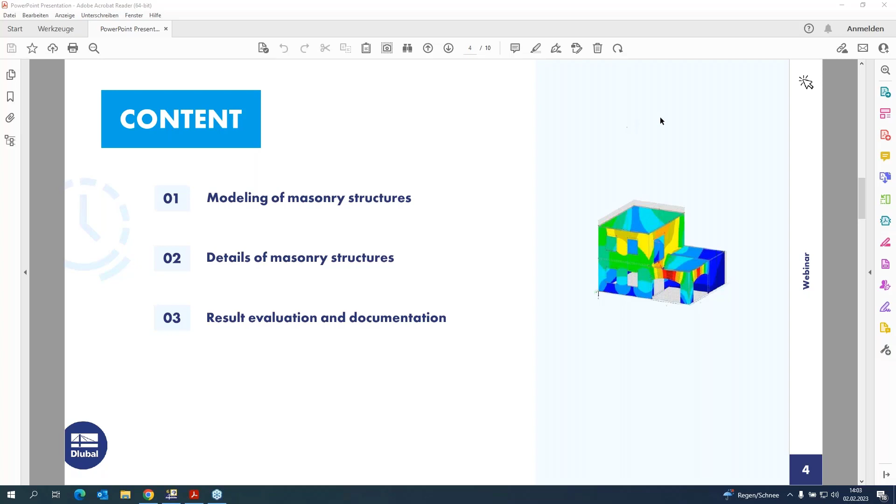So I will start directly with the program. I have prepared a structure with lines and nodes so that it is easier to continue. You can import such a structure also via DXF, or with Revit, if you get this file.

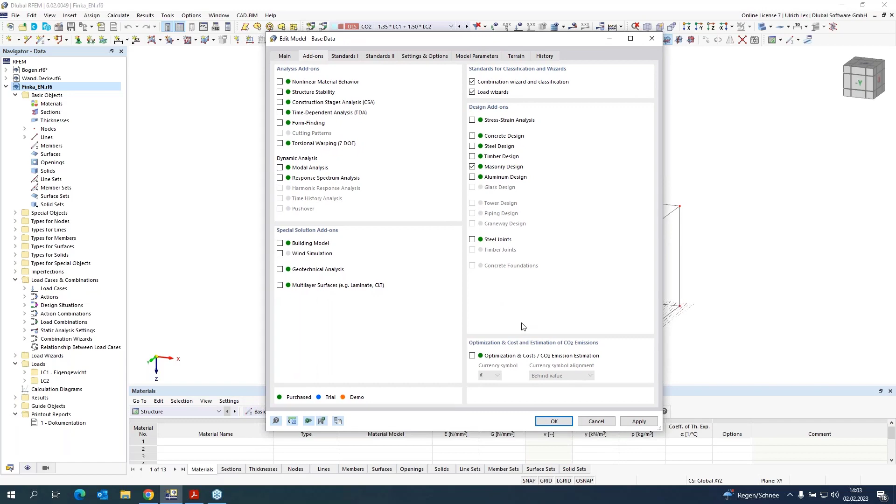So at the beginning, when you work with the masonry add-on, please check in the base data if the module is checked on. This is necessary so that the material model is available in the program. If it is checked on, you can continue with OK.

So for the first step, I want to create some new materials. I can do it here with new material. I can choose one new. At first, I can choose the material type masonry, and here's the material model what I want.

Basically, we have two different material models for masonry. The isotropic one, some of you know it maybe from RFEM 5, and the orthotropic masonry, where you consider the stiffness in both directions and the shear stiffness of masonry exactly. So this orthotropic one is the best one.

Now you can choose a material from the library. I want to create a new material for the outer wall, maybe in orthotropic.

In the database, there are still only products from Austria, but we are continuing to develop or implement new materials as far as we can. So if you read in the materials, you can see in the standard classification the table is filled out. You can also do this with data sheets from a manufacturer. You get all values, I think, from the manufacturer.

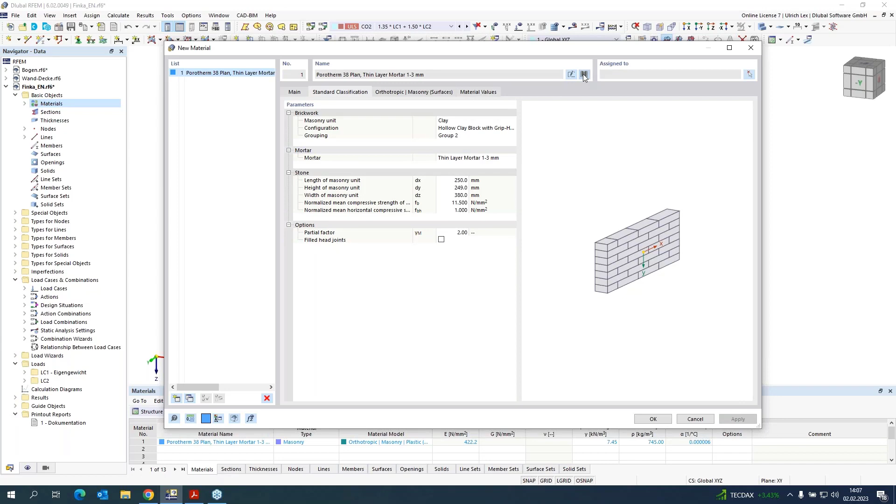Okay, then I will continue and create the next material for the inner wall. It's the same as before. Okay, I have to do it again to create a new one.

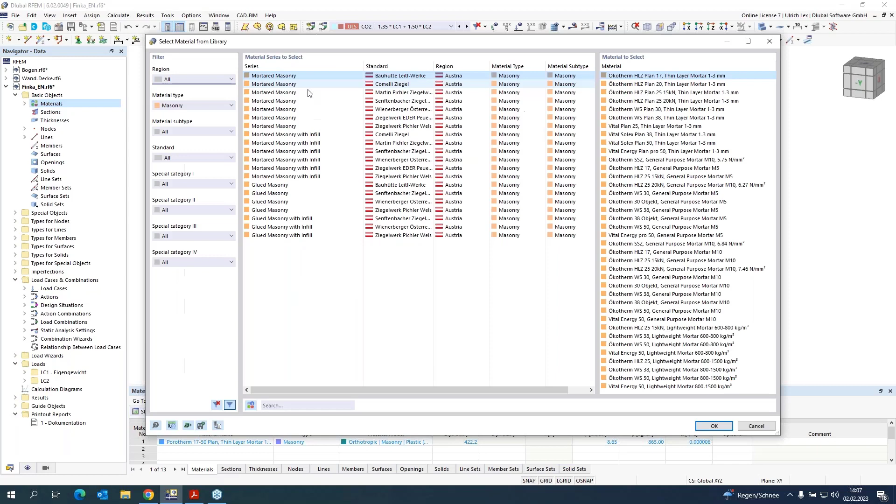And the third one, I want to create a patio and use a full stone maybe. And as the last material, I want to create a concrete for the slabs. So very important, you have to always set the orthotropic material model.

Okay, the next step I want to do is to create the thickness. So the first thickness will be the outer wall with 380 millimeters. The second one with 170 millimeters. The third one 250 millimeters. And as the last, the concrete one with 200 millimeters.

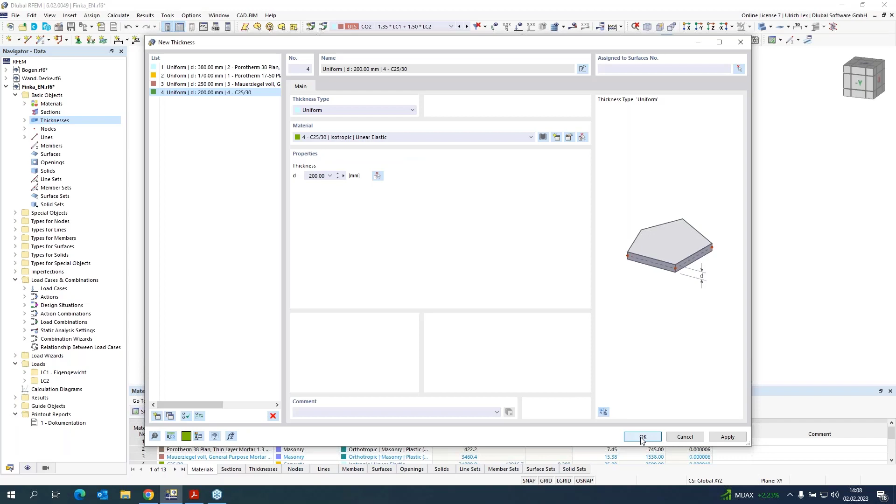So now I have defined the material and its thickness. Then I can start to create the surfaces. As I already have the nodes and lines, I can do it with select boundary. I can choose my thickness for the outer lines, or for the outer wall, and choose my lines to create the wall. I will do it for all walls.

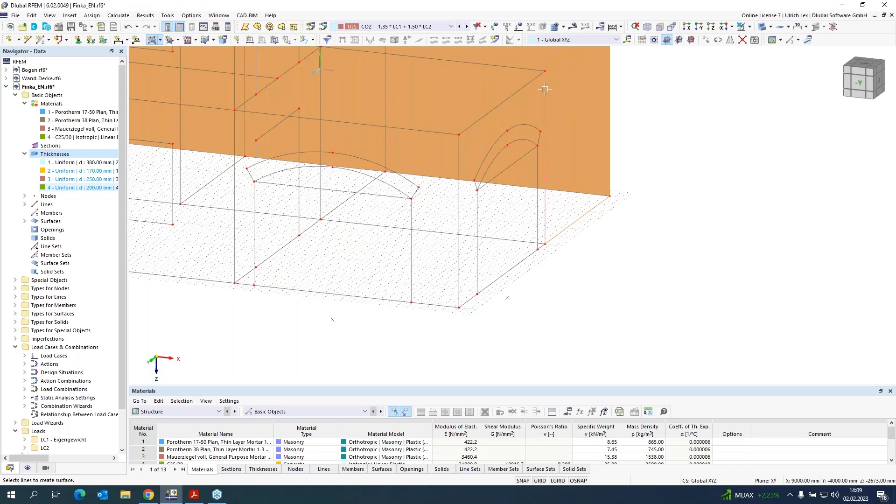This one, and upstairs I have also 4 walls.

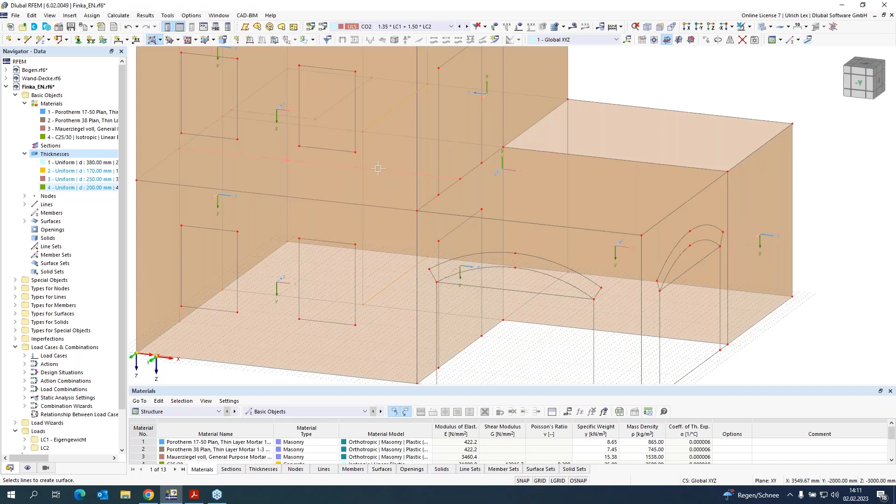And the last one. Okay, as next step, I want to create the inner wall. Choose my thickness - the material is automatically attached to the thickness. I only have one wall inside the building. As the third one, I want to then add... okay, I have here to choose this line.

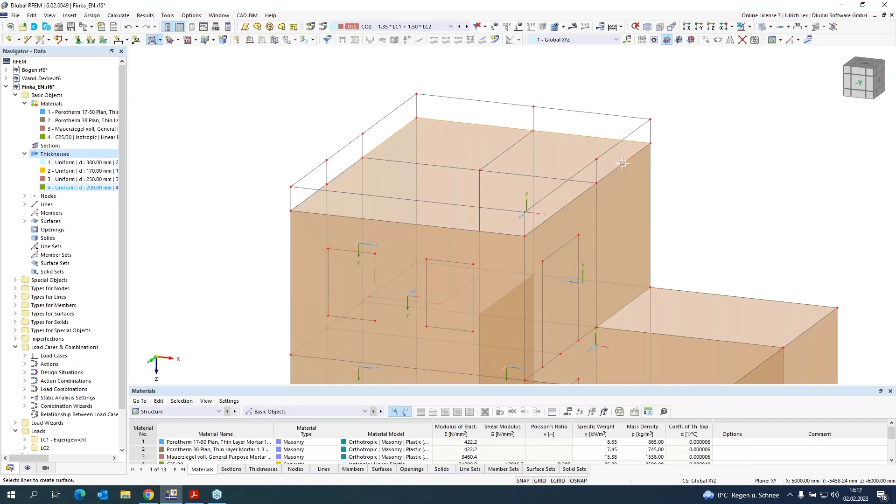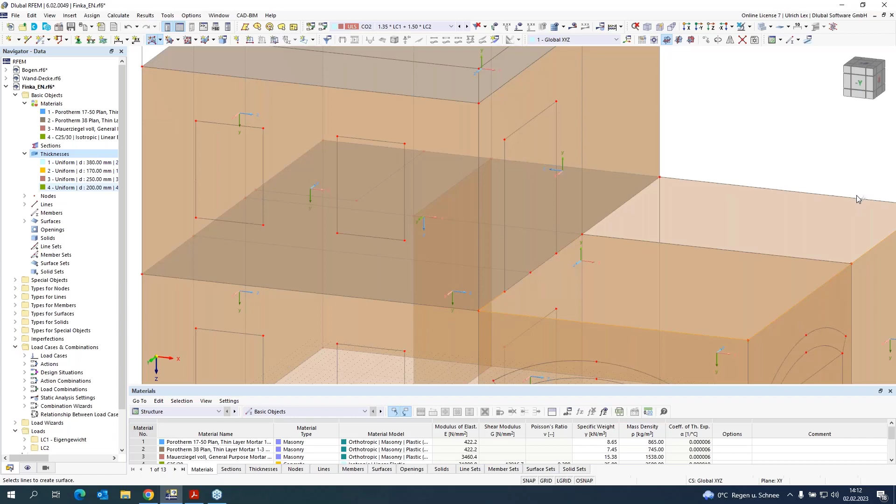And as the last step, I want to create the concrete slabs - one for the roof slab, and the base plate.

So, okay, that was the final thing.

On the roof, or for the roof slab, we have the first thing we have to consider if we work with masonry walls. If you have a masonry wall and a roof slab, then always the slab wants to turn up at the edges. That would cause damage here in the masonry.

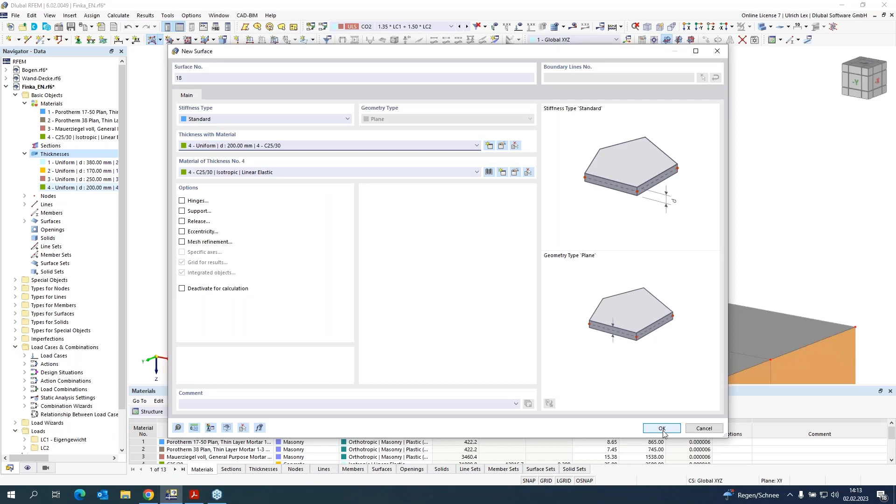That's why we have to create something so that the slab cannot turn up. In this case, I want to create an attica in concrete, so this turn up cannot happen.

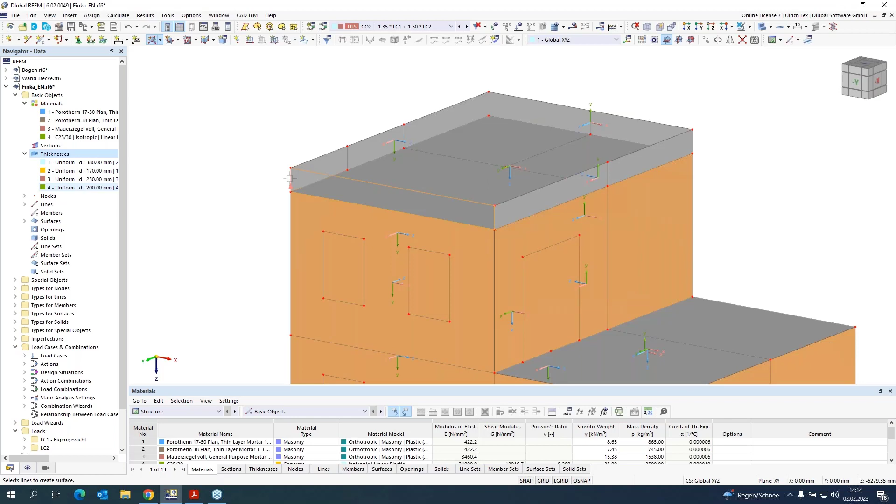That's why I create here some additional surfaces in concrete. That's the attica. Oh, that's the wrong line. Okay.

Here on the patio, we do not want such an attica. That's why we have to think about another possibility to avoid this turn up.

Here I decided to create a new member that connects the slab in the first floor with the base plate, and to, I would say, hold the slab so that it cannot be turned up.

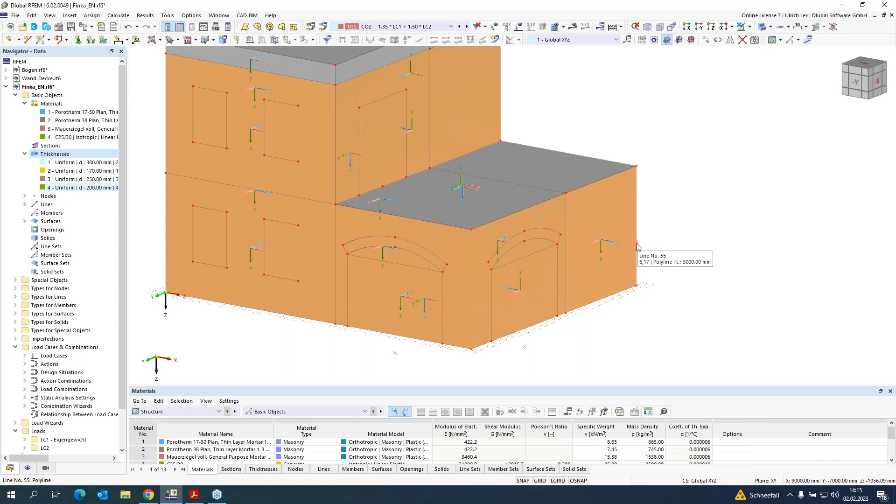So here I can select it and double click and assign a new member, like a member type beam, create a new section, material concrete, dimensions maybe 250 to 250 millimeters. Okay.

Now we have modeled the whole structure of the building. What do we have to think about now?

An important thing is also the local axis of the surfaces. For masonry, masonry does have a different stiffness in Y and X direction. That means the Y direction should always be in the direction where it is loaded, and the X direction is the other direction. The Z direction is important in our program to evaluate the results. And I'm used to orientate the local Z-axis in the same direction - I always try that all local Z-axis show inside the building.

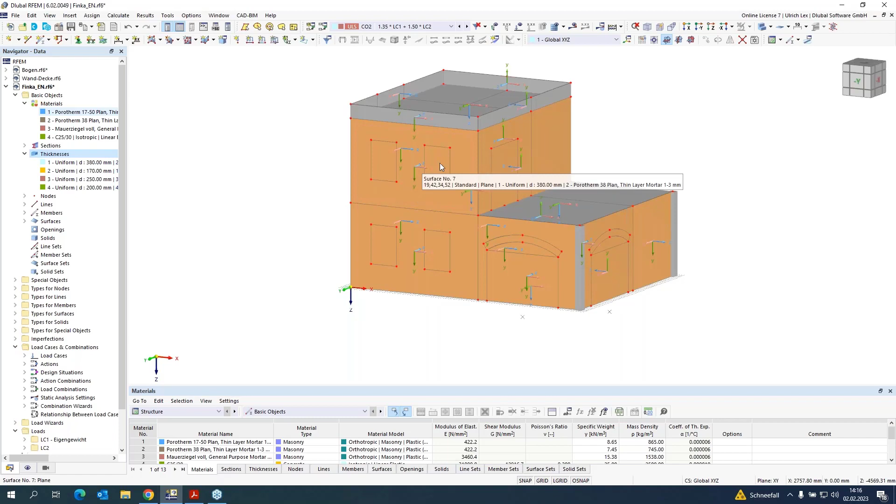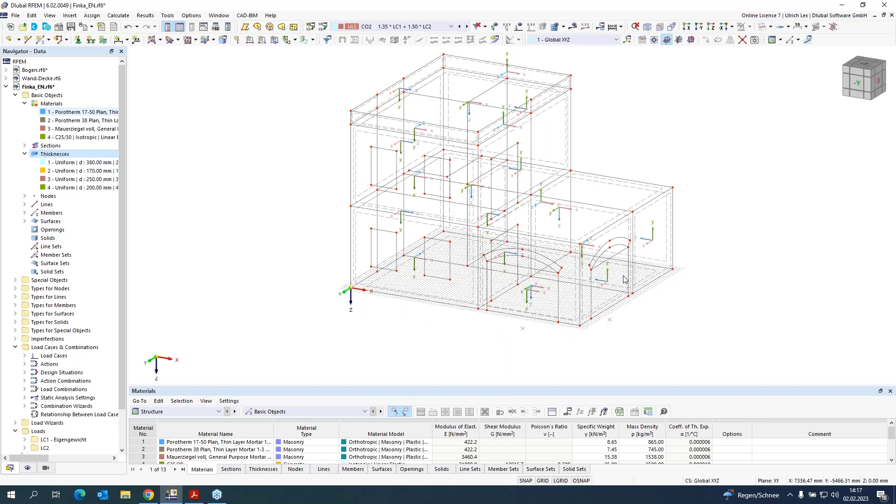That's why I changed it for this surface. Here it's okay, here it's okay. So, and maybe this is inside, this is - we have to change. Okay, so far so good.

The next step we can do is create the openings. The lines are still there, that's why we can use them - we can define it graphically. Here, here, and here. And here is the door - inside is a door.

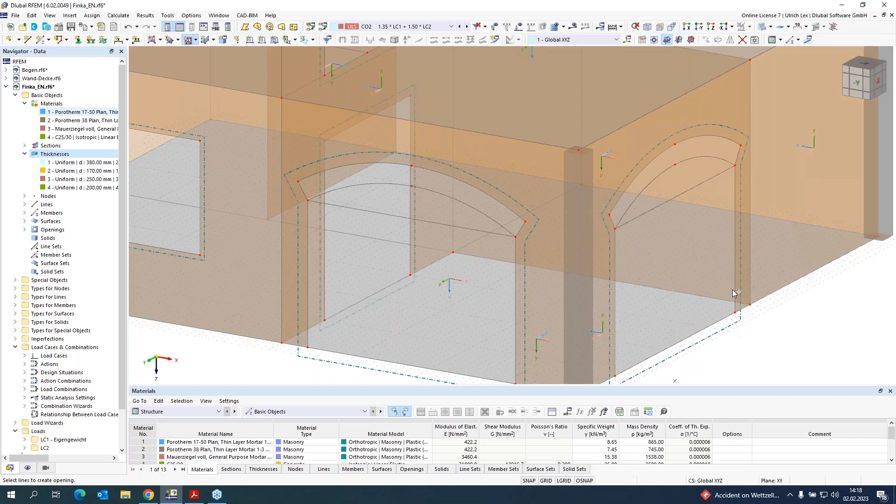Here we want to create such an arch. Okay. If we create openings in the material in a masonry surface, we have to think about the lintel, because the masonry does not have stiffness for tension. So it could be that this area falls out from the wall. In practice, there will be some masonry lintel or something else, but this is the reason why we have to create it in the program too.

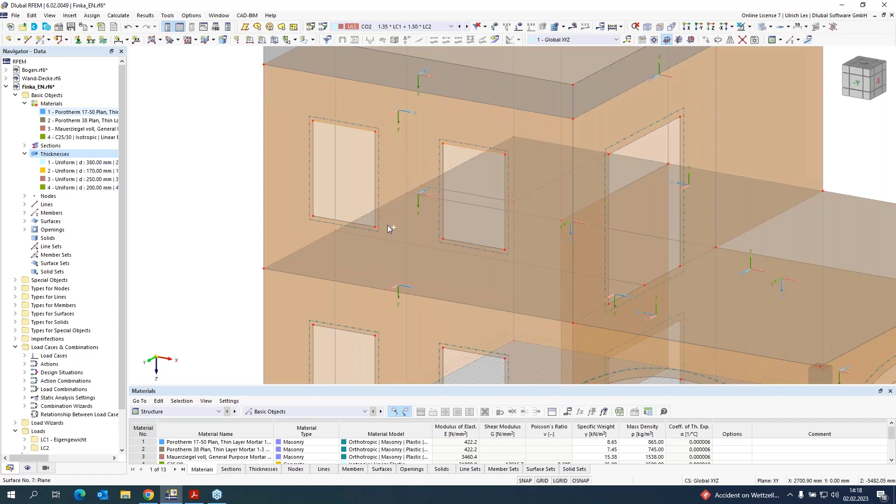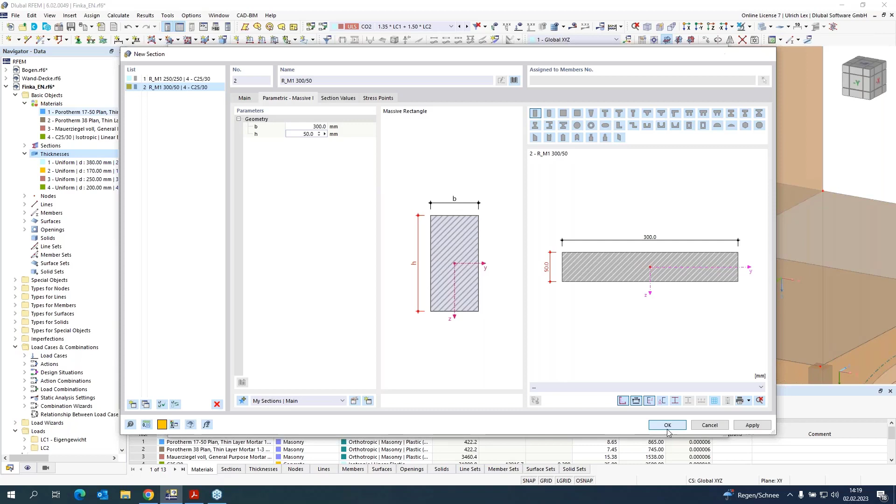Therefore, I want to create a new member, or assign a new member, create a new section, concrete maybe with a width of 300 and maybe 50 millimeter high. Okay.

If there are bigger openings, then it is the same - you have to create a lintel too, but we have to extend the line a little bit into the masonry wall. That's why I extend this line 10 or 100 millimeters into the masonry wall. The reason for this is that I can smooth the loads, so that not one FE node gets the whole load from this lintel.

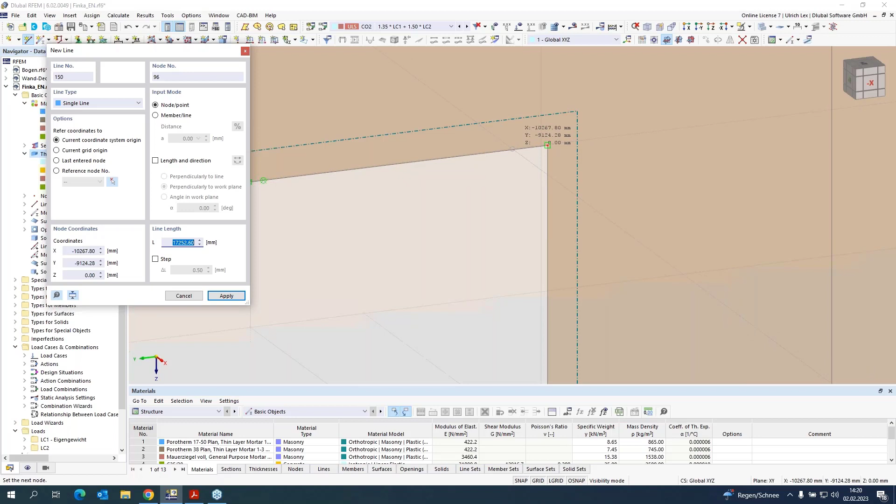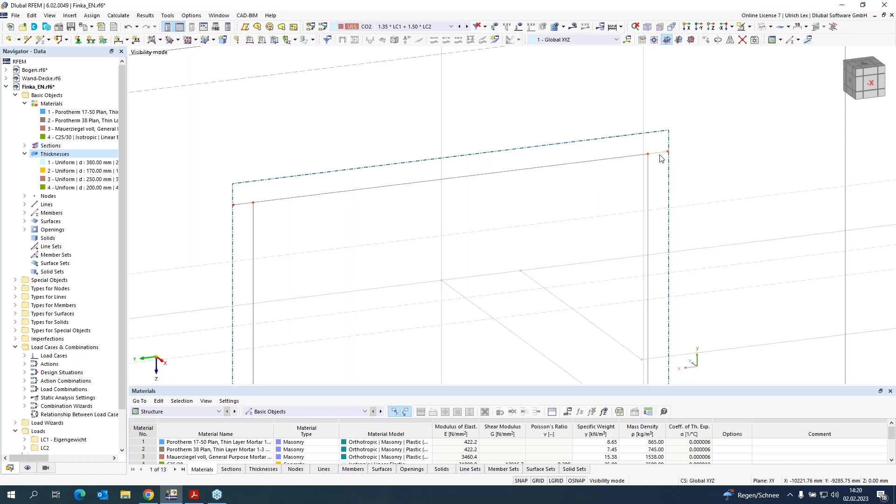To copy it, and I want to copy it also for the second opening. And here I can create, or I can assign this member to it.

So as a next step, I want to take a look at this arch. Here I do not want to assign any concrete lintel. I will assign a new surface with masonry material.

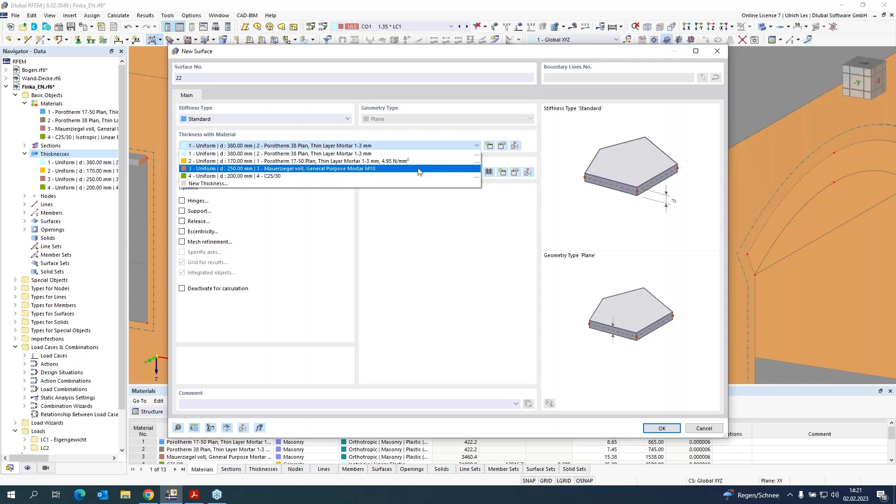And the second one too. And now, is it necessary that the local y-axis is changed? Because my load transferring is parallel to this line, and therefore we have to change this local y-axis.

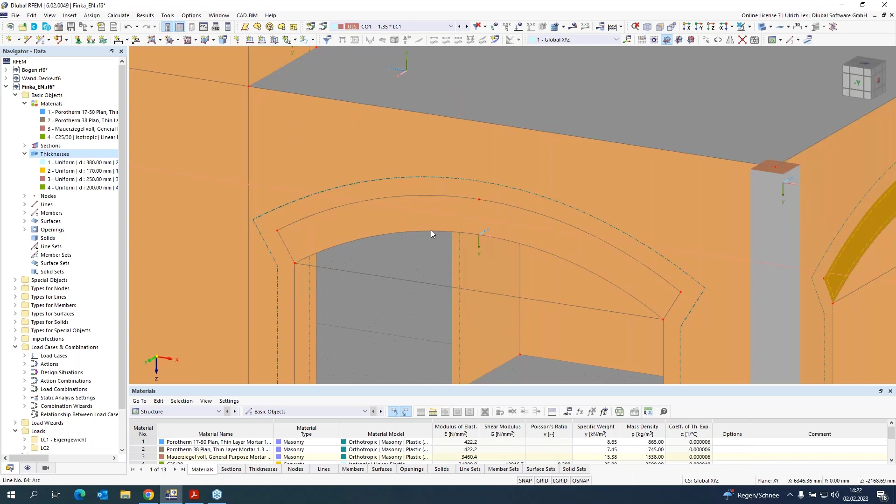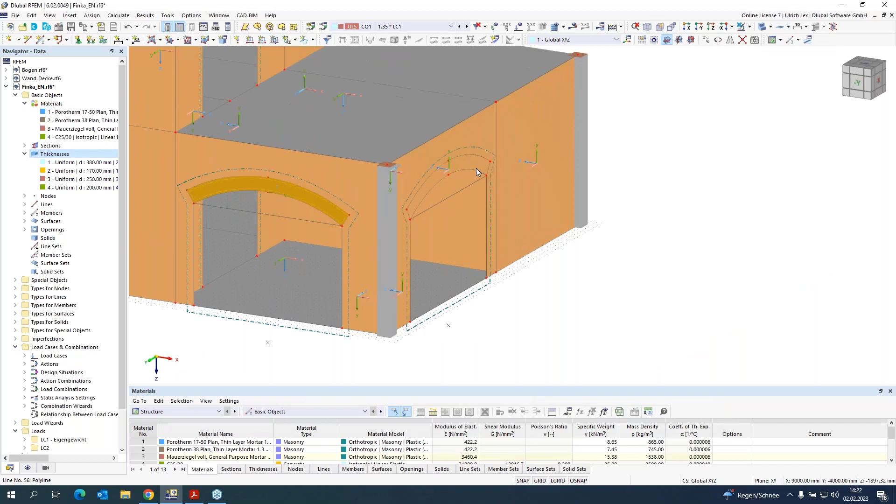I can do this in the surface dialog with specific axis, input axis parallel to a line, choose the y direction, and choose the line. The same for the second. Okay, so far so good.

The next step I want to take a look at is the connection between the masonry material and the concrete material. In practice, I do not know if it's 100% connected. I would say maybe there's a little bit of friction in the connection, but on the safe side, I would assign a hinge where I disconnect these both materials. That's why I create a new hinge.

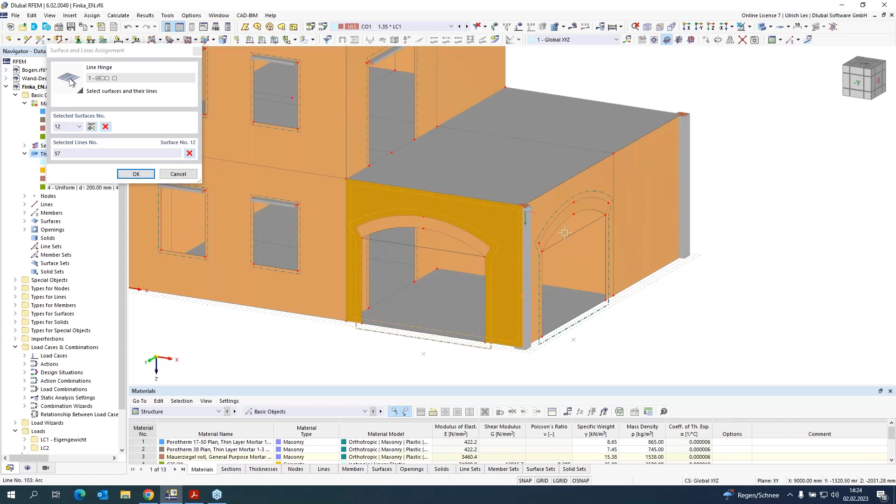In the X direction, so that I have no shear connection between the masonry surface and the concrete surface. I will assign this to this surface, to the second surface, and also on the member behind. Okay.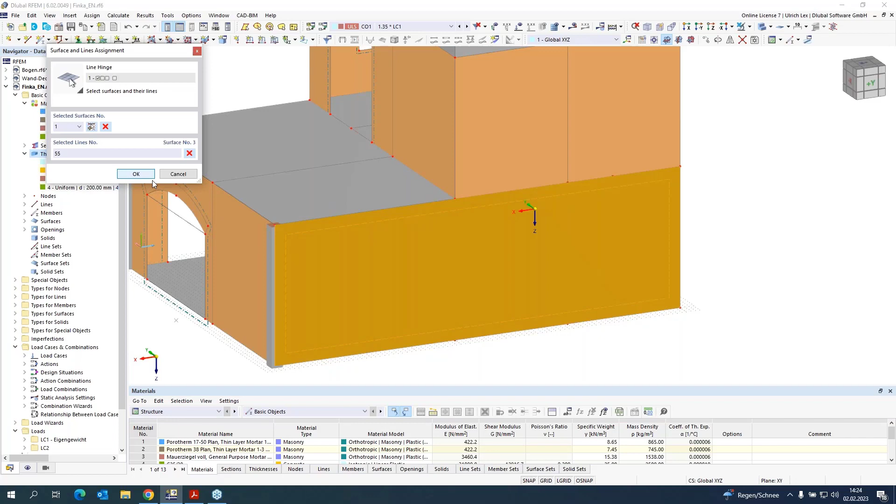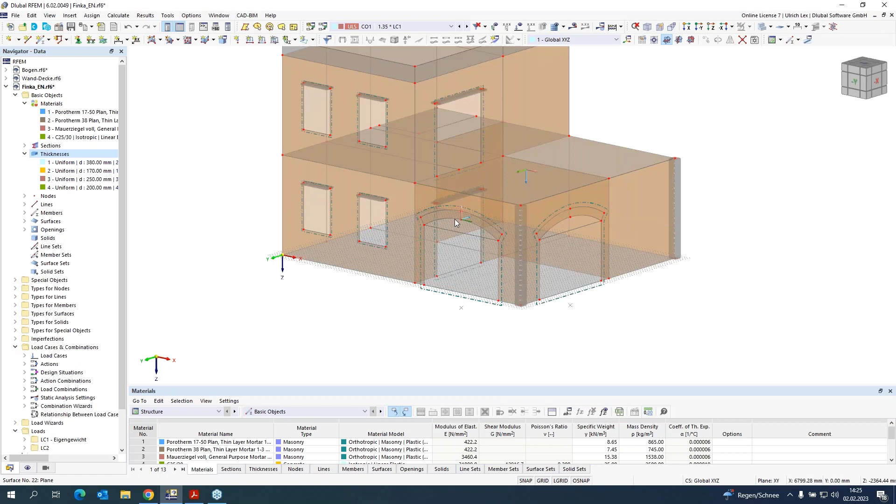Here I can check where the hinge is located, the same thing. What I have to think about is for the inner walls. In practice, I think the outer wall is built up, and at a later time, the inner wall is built. Maybe there are some masonry connectors assigned, but I do not think there's a full shear connection between the inner and the outer wall. That's the reason why I assign also a hinge in the local X direction.

As a last step, we had to think about the connection between the concrete slabs and the masonry wall. Here it's a special thing for the masonry, because the concrete slabs are not lying with the whole width on the masonry structure. That's why we have to assign here a special hinge. It's called slab wall connection.

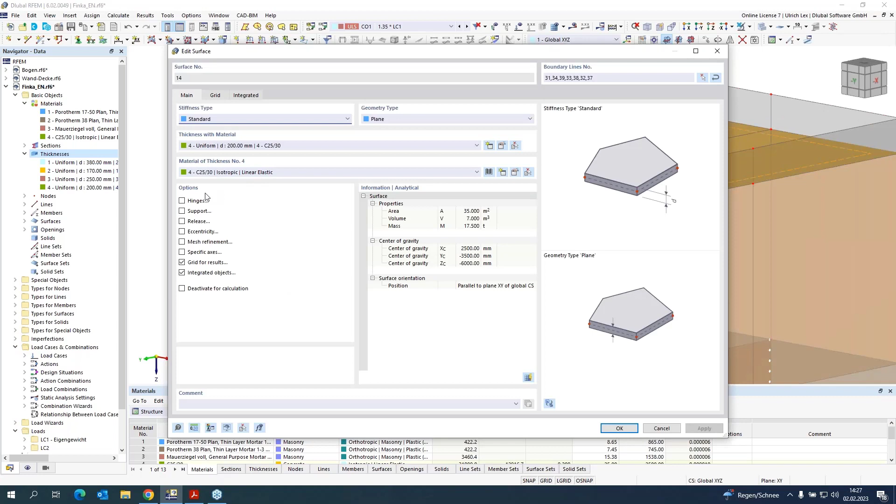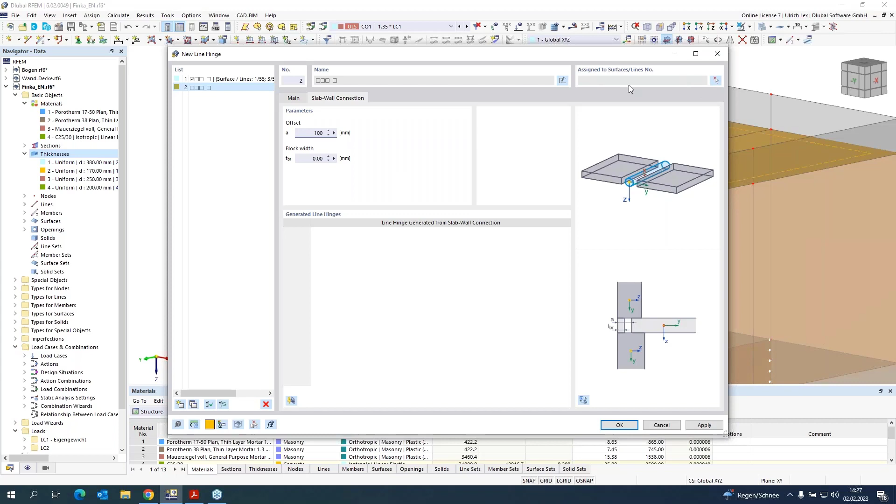I have to assign this on the slab. That's why I define it on the slab. I assign a new hinge, create a new one, and here I have the option to choose the slab wall connection. It's only a placeholder where I define the geometry of this connection. You can use the tab slab wall connection. I define here 100 millimeters and can assign it to the line and surfaces. I have to assign it here on the slab roof.

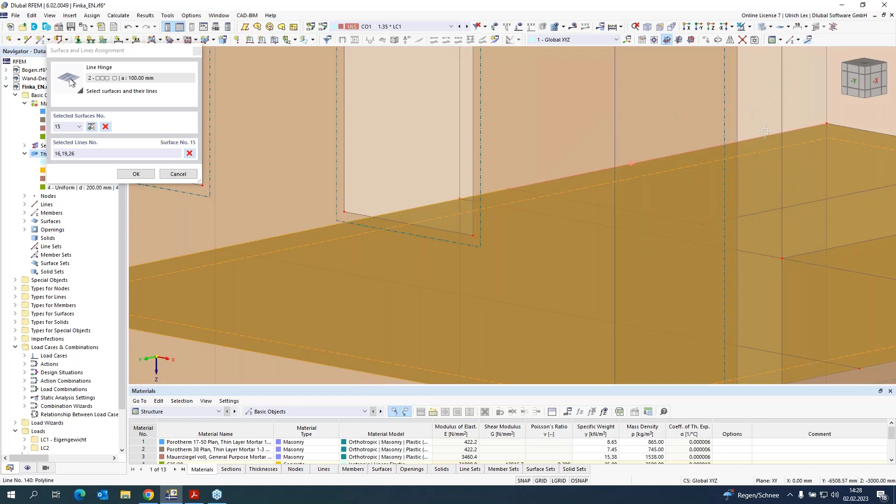Here on these lines. Here I have an opening, maybe for the stairway. Here I do not have to assign this wall slab connection. Why not? Because both walls are standing directly above and there is no slab connected.

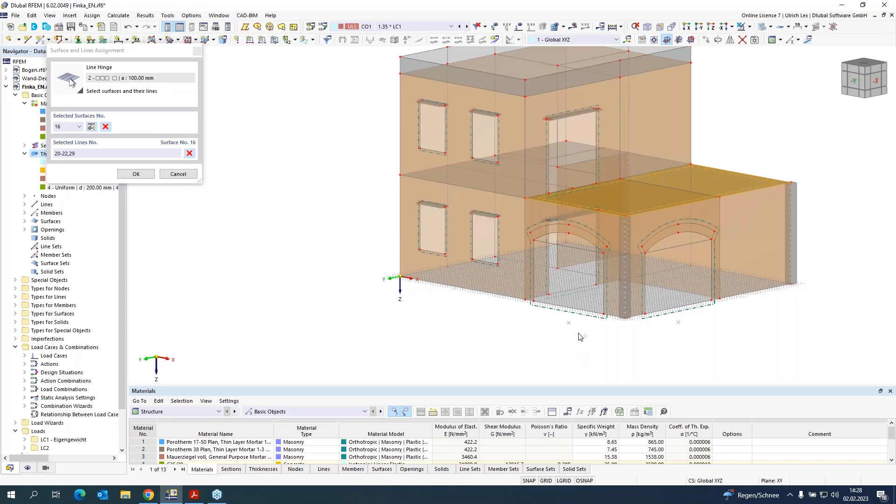It could be possible that we have to assign it also for the base plate, maybe when some insulation is assigned before the base plate. But I will not do it for this example.

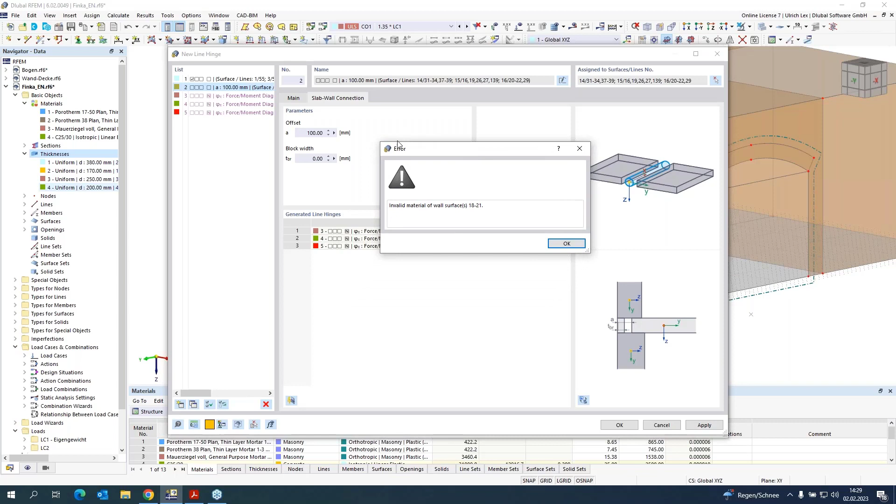So if you have assigned it to the surface and lines, it's really important that we generate the line hinges for the connected walls. You can do it with this button. One error we get is okay, because our Attica is a concrete material and no hinge will be generated there.

Now you can see the generated line hinges. The amount of the hinges is not important because it's connected to the orientation of the surfaces and its lines. So the program does this automatically. If you continue with OK, you can see the generated line hinges.

What happens here on this detail? I have prepared an extra file where I can explain it. What happens on the wall slab connection? The slab does not lie above the whole width of the masonry wall.

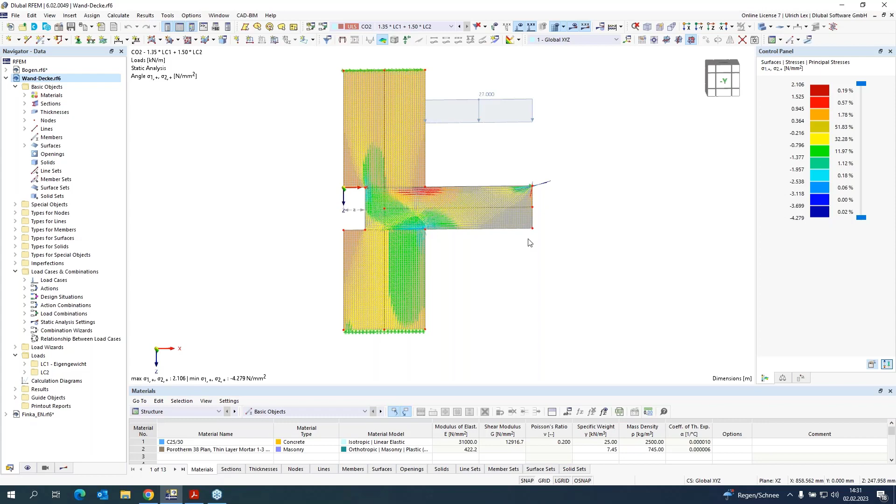And our slab wall hinge does only this: we have a limit of the normal force and a limit on the bending moment. I can show this on the original file. If I open such a generated hinge, we can see that if we have no normal force, we cannot have a bending moment. If we have a normal force, we can have a bending moment too.

So if the normal force is too high, so that the stiffness or the compressive strength is overloaded, then we can only have a smaller moment again. And if you have too much normal force, the detail point is overloaded and we have no stiffness on it. That's why it's so important that we assign this hinge in case of a concrete slab.

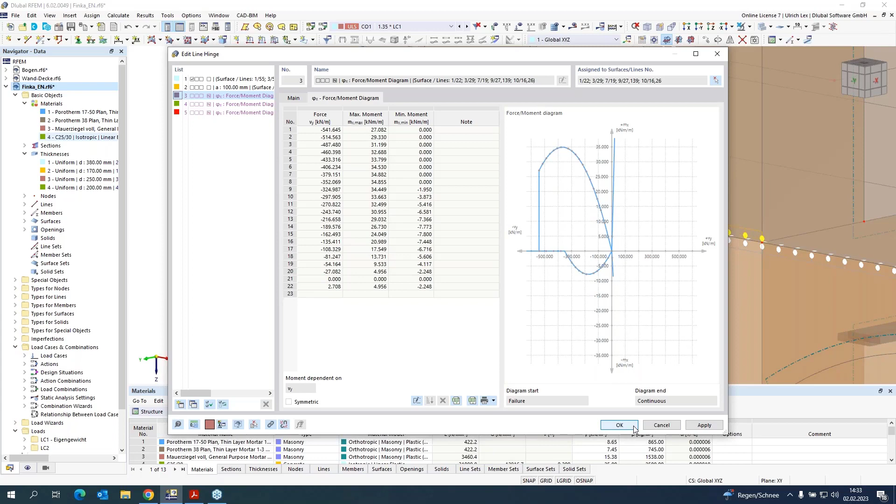Okay. If we have assigned all these things, then we are ready with the modeling. I can continue with the loading. In our case, I want only a self-weight with 2 kilonewton per square meter assigned.

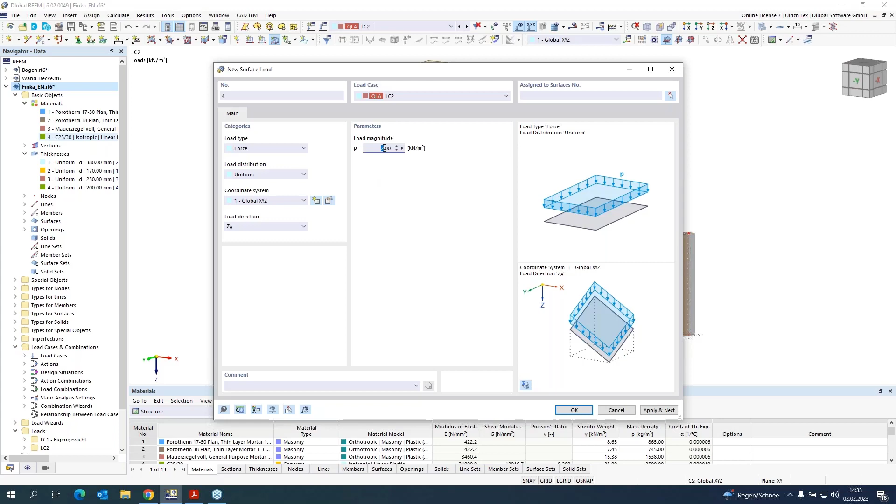And for imposed load, also 2 kilonewton, and maybe 4 kilonewtons on this patio. Okay, so this loading is only an example.

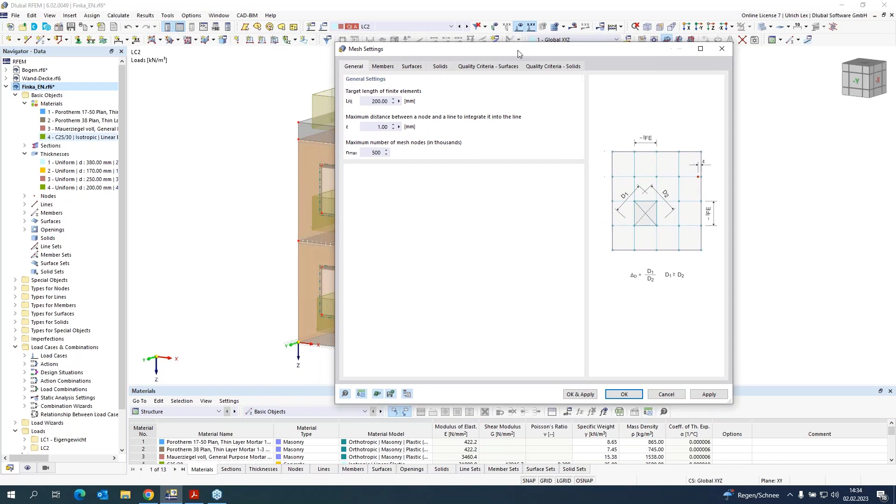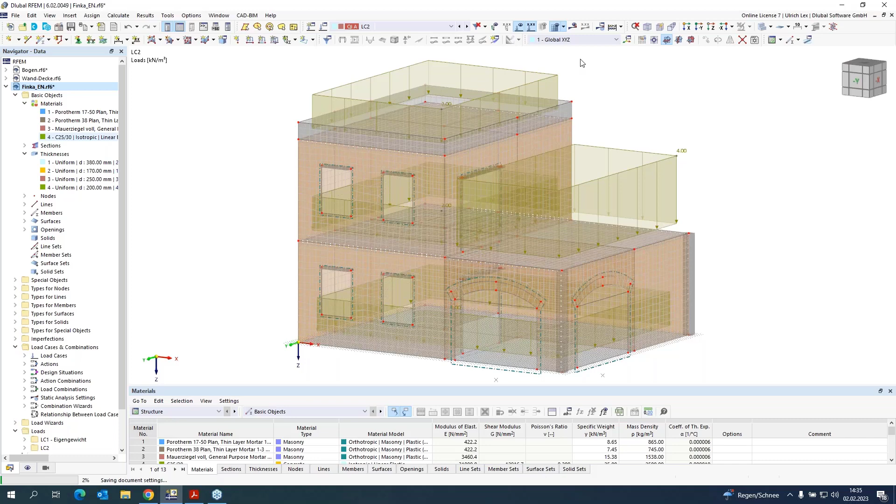So what have we checked before the calculation? We have to check the FE mesh. It's very important because of the nonlinear materials that we have, and that we have a good FE mesh. We can recommend that the FE mesh size should be between 200 and 250 millimeters. Of course, it can be a little bit smaller or bigger, but it should be about this size. It's necessary that you as engineer check it, and you can say that it is a nice FE mesh. Because when you have too many small elements or too many triangles, the calculation time could be very high, or the calculation might not come to an end because of this inconsistent FE mesh. So it's necessary in some areas that you assign some mesh refinements or something else.

So the next thing we have to check is the calculation type. For the calculation type, do we have 3 options? The first one is geometrically linear, the second is second order, and the third is large deformation. I would recommend maybe the geometrically linear or the large deformation.

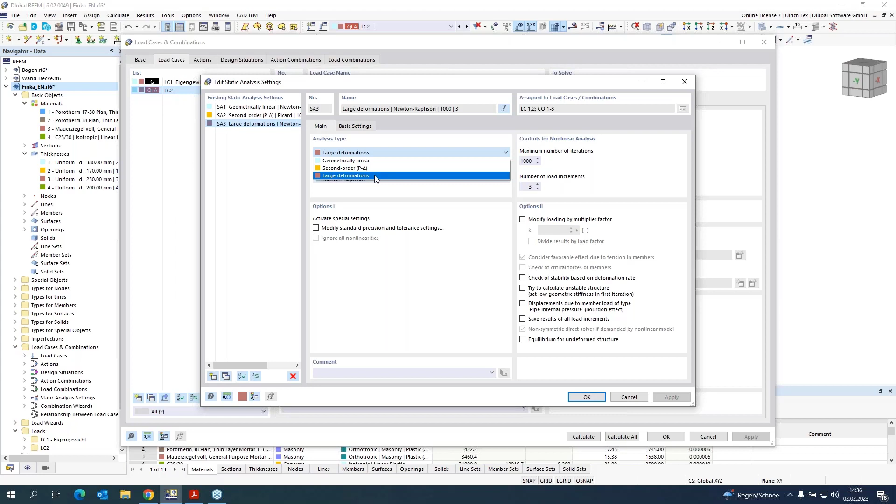The second order is as default the Picard solver. This solver is not so good for the masonry material model. For normal buildings, I would recommend the geometrically linear. It's also possible for the nonlinear material model. And for structures where you have really thin and high walls, I would recommend the large deformation analysis, because then you have the moments from the deformations in the system too.

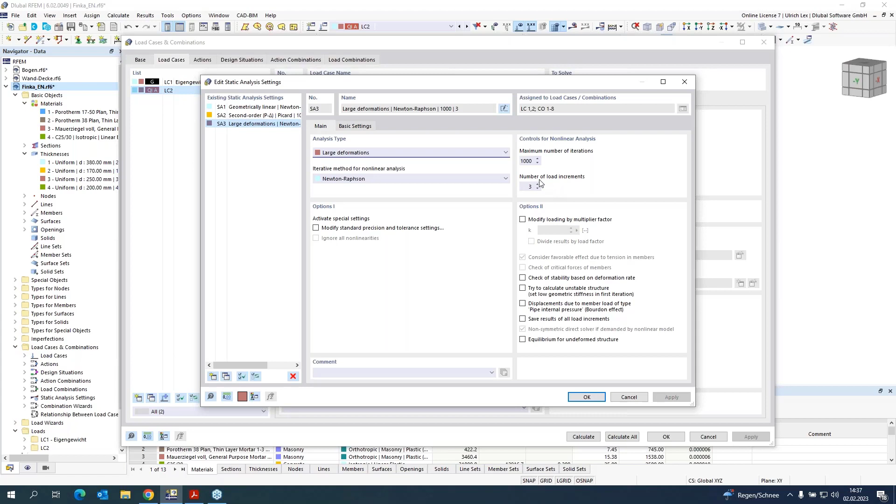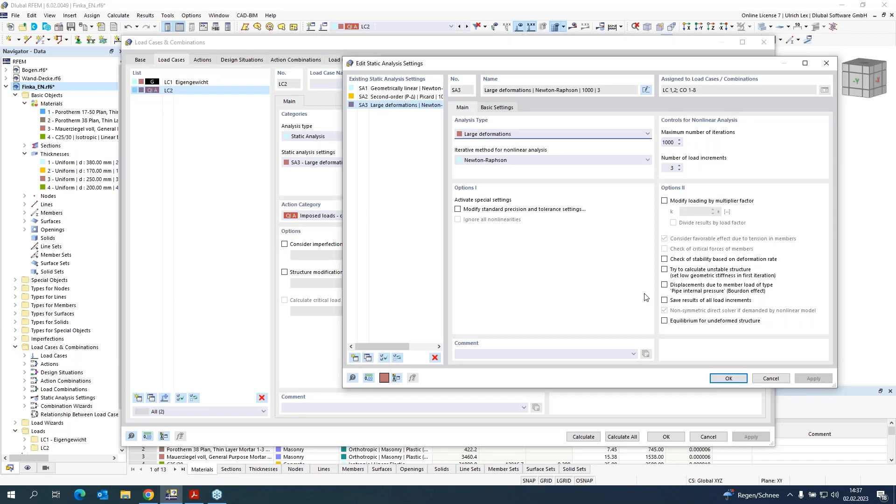For the nonlinear calculation, is it always good to increase the number of load increments? I would recommend here a value of 3 to 5. This is because then the FE element will not be loaded on the first step with a complete load. If you want to see the results of each load increment, you can check it here, but it will increase the file size, so you have to think about it.

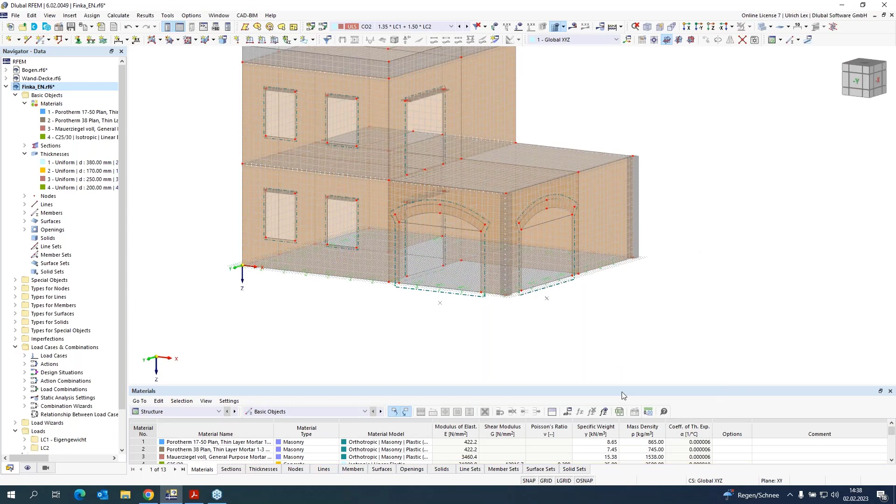So that was all we have to consider, and now we can start the calculation. Oh, I forgot the support of the system. I want to support the base plate. That's why I assign here some spring constant, and now we can compute it.

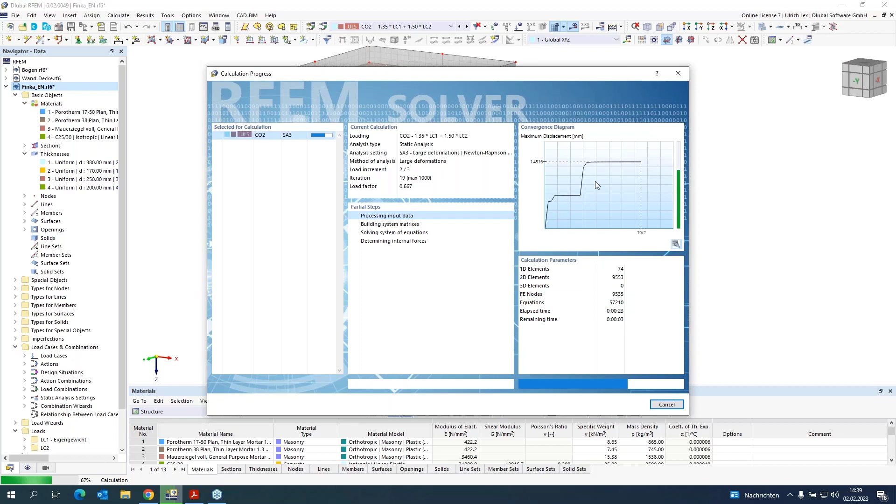So here you can see the iteration process. You can see the load increments that are computed. You get information about the FE elements. If you want to see this curve afterwards, you can check it in the calculation diagrams. Oh, and now the calculation is finished.

When the calculation runs without problems, then all criteria for the masonry material are okay. For the masonry material, there is no check about the ratio. It's not possible because of the nonlinear behavior.

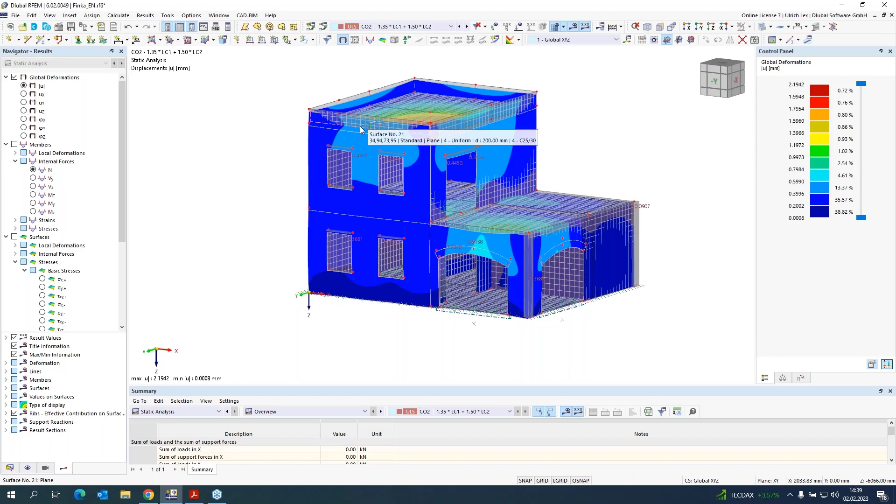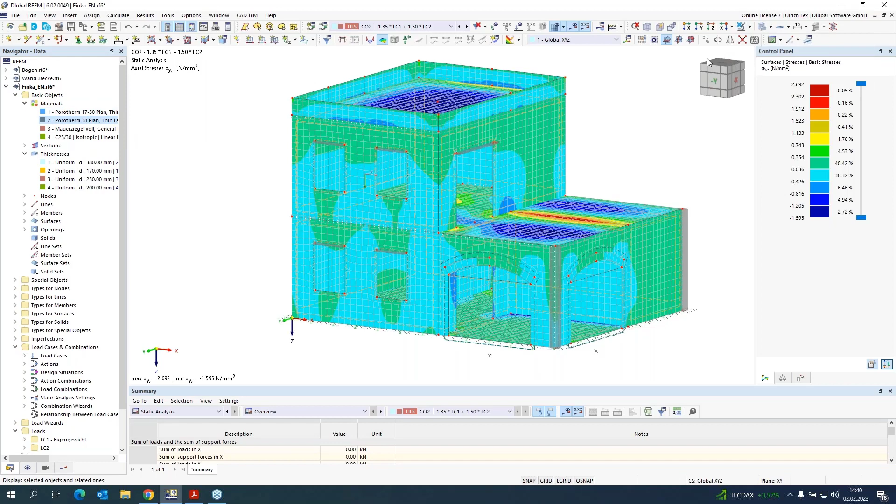Here now we can check the results. Maybe we can check the stresses, the stress in sigma y direction. And if I take a look on the walls, the masonry walls, then I can see that I have a maximum sigma y direction in tension from 0.048, and it's the same as we have here for the orthotropic details. We have an ultimate tensile strength from 0.05. Here we can see that the computing of the material model is correct.

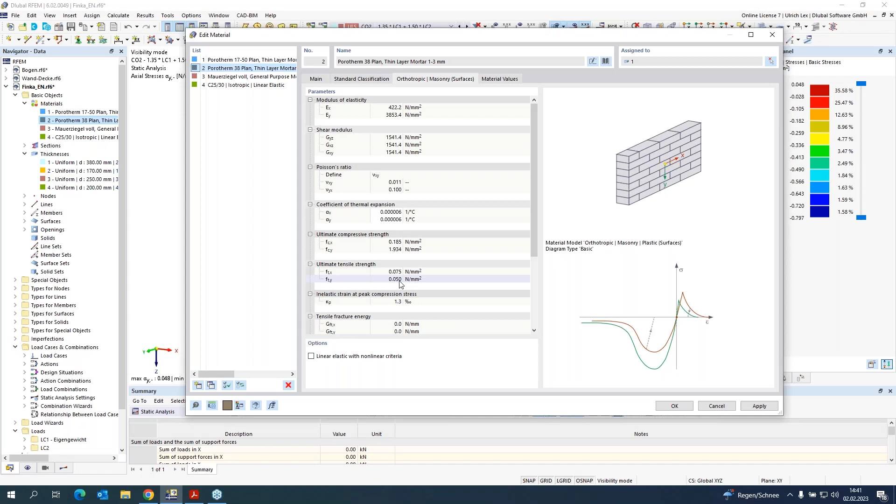That does not mean that we are overloaded or something else. We only see that some elements have a tensile strength, but we have not more than is possible for the material model.

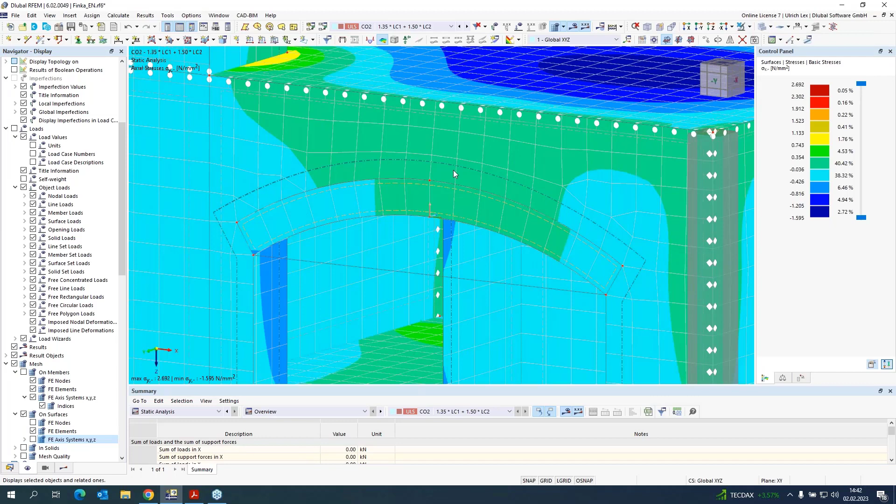So okay, the next detail I want to show you is this arch. The calculation, the FE elements of this arch are now oriented in direction of this line. Oh sorry, I have only to... You can see the local Y direction is in direction of the line, and that's why we can create this arch.

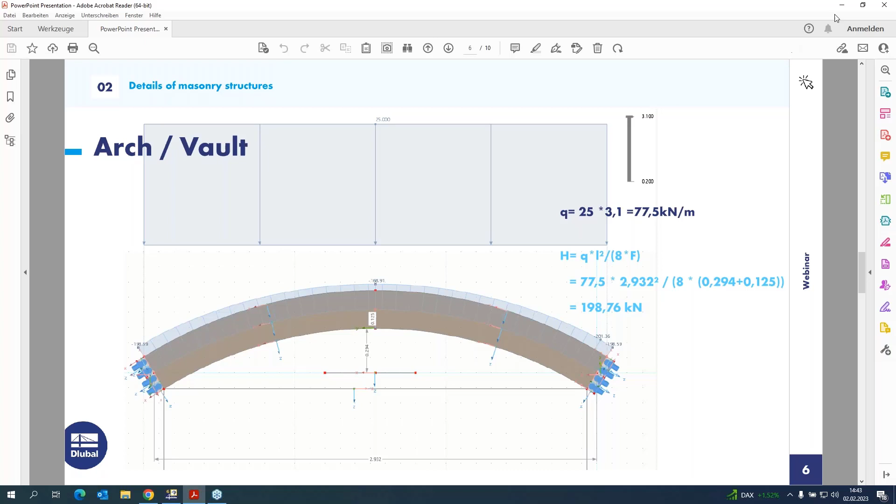I tried to compute this arch also by hand, I would say. I created therefore a separate model. When I take a look on a formula for such an arch, I get a maximum horizontal load for this arch of about 200 kilonewtons, with a loading of 77.5 kilonewtons. If I compute this in our program,

I did a stability analysis where I compute the maximum load of this arch and get an increasing factor of 3.1. Then I have this 77.5 kilonewtons loading, and the normal force in this arch is about this 200 kilonewtons. That shows me that the analytical formula gives the same results as our material model from masonry.

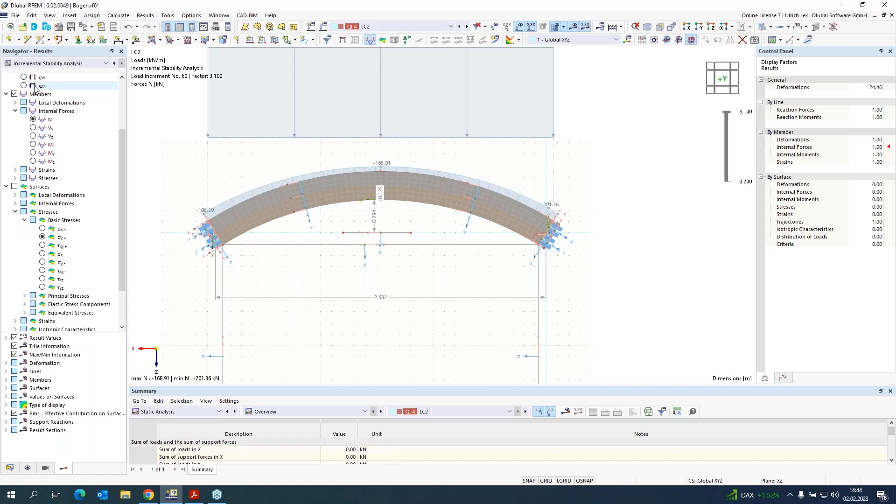Here I can take a look at the deformation, and it is like I would expect it as an engineer. The same is for a half-side loading. So the deformation is looking like expected.

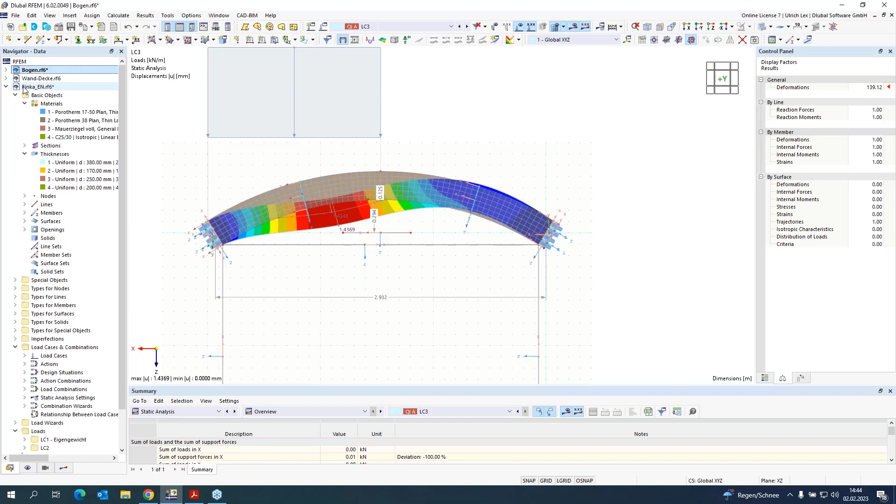Okay, then back to our Binka. Now documentation and results. For the documentation, we can create a new printout report.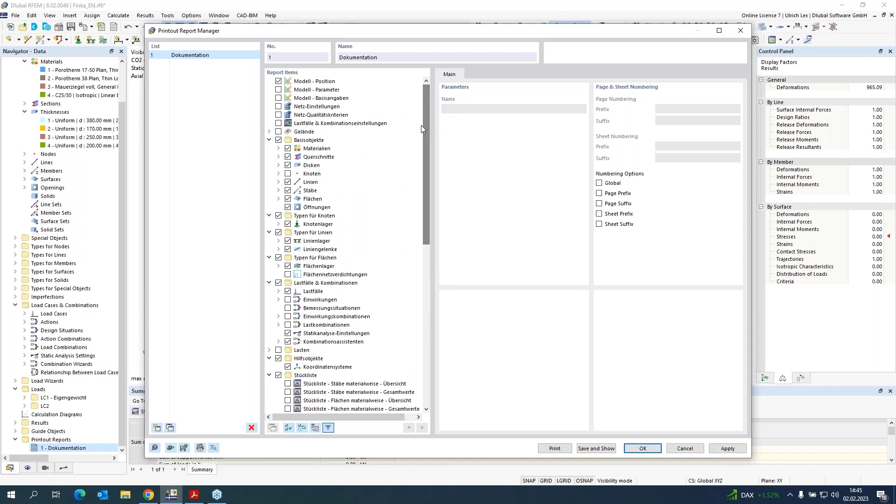If you create a new one, you can select a lot of tables, result tables, everything you want to document, the important things you need. More important in my eyes is to document some pictures. This can be done easily.

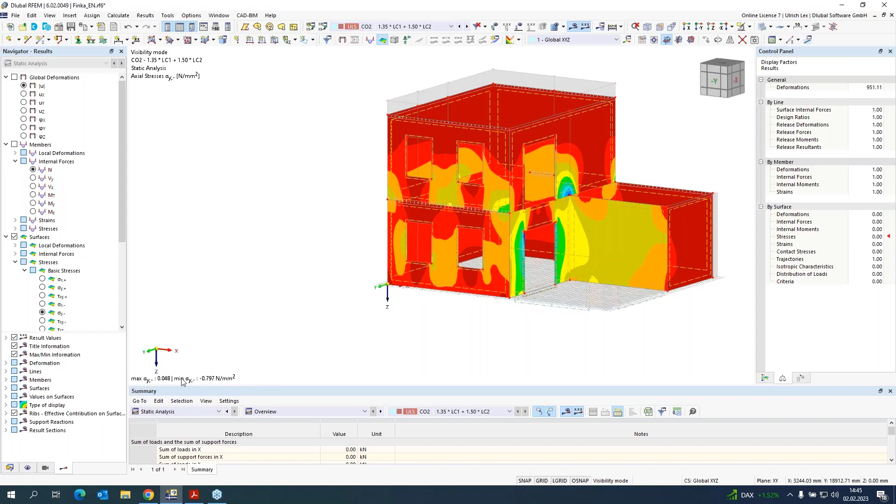Maybe you choose the outer walls. Then you can see the maximum Y stresses here. You can see that the maximum compressive Y stresses on the minus side - this is the outside of the building - are 0.79.

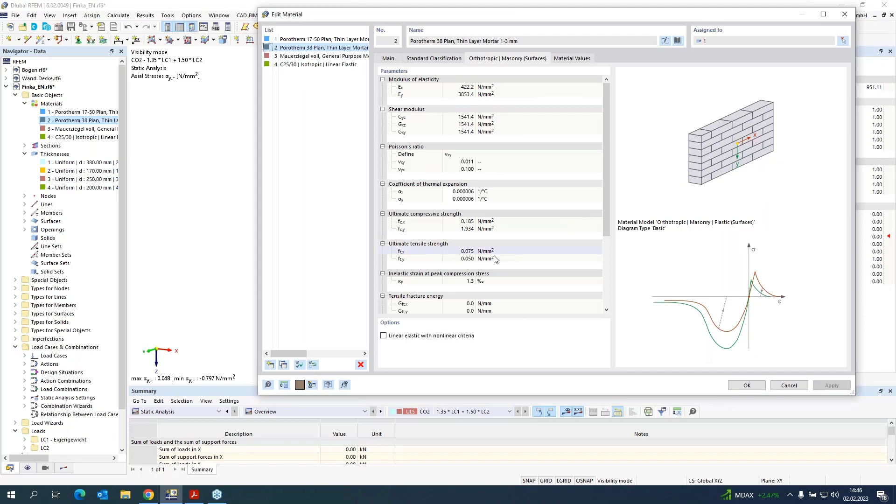And if I take a look at the material, the maximum compressive strength is 1.9. So the design ratio is not 100% in this case.

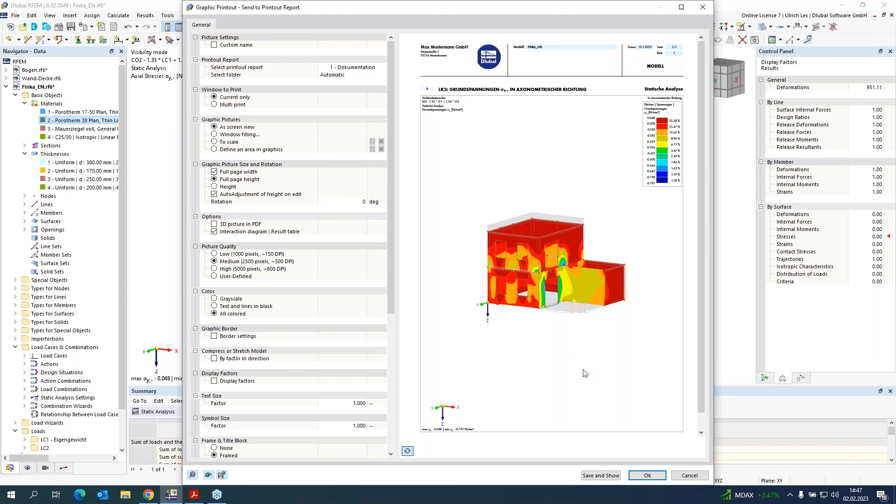Okay, I can print this to the printout report via this printer button, print graphics to printout report. Here you can set maybe also a scale where you want it printed, or on the full page, and with save and show it is printed to the report.

Exactly. So the next possibility I want to show you is some other sections. You can create a new section, maybe here.

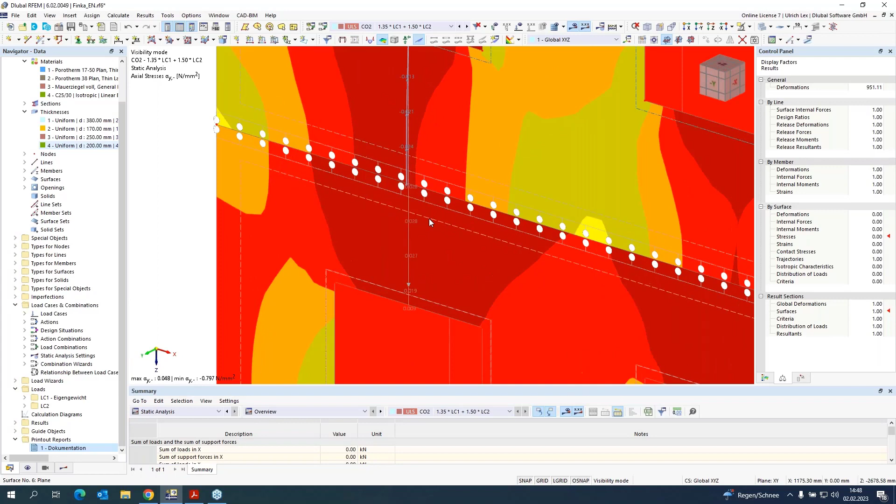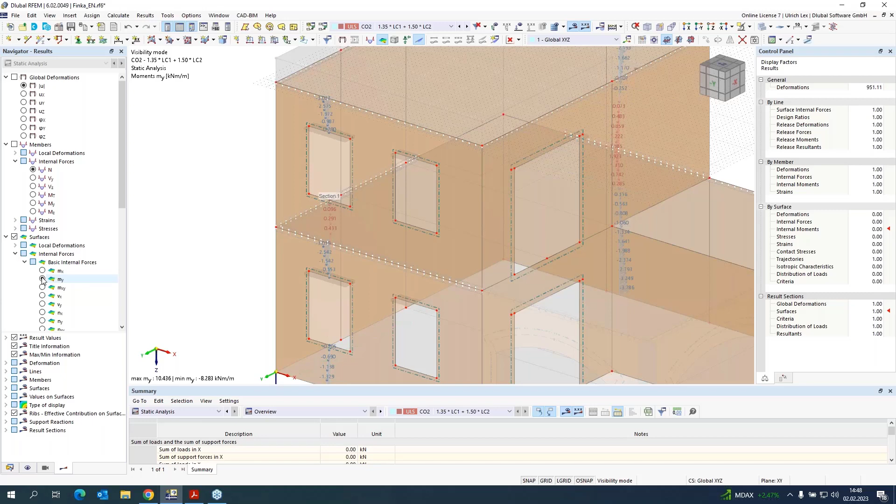Okay, then you get results. You get results on this line, I would say. You can check the moments that are on the node, and all other results. Maybe the My moment, then I get the moment that is existing on this slab wall connection.

Also, a possibility is to check these results with a result beam. Here I can assign a new beam, a new member, and choose a result beam. Then I can say, okay, I want to see my results, or sum up my results in an area of 1 meter, and want to see it only on this surface.

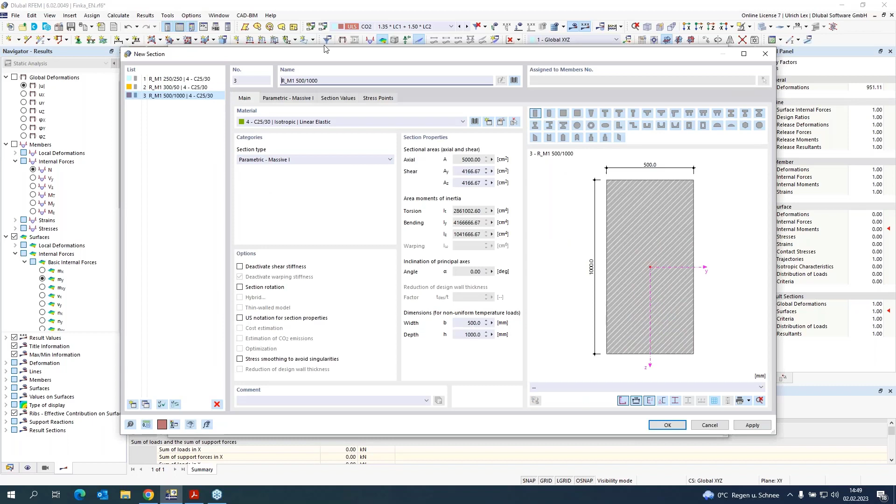Here I have to create a dummy section, but I do not want to design this section. I only want to see the results. And now I can see these results as member results, maybe also the moment. I can do the same for the line above - result beam.

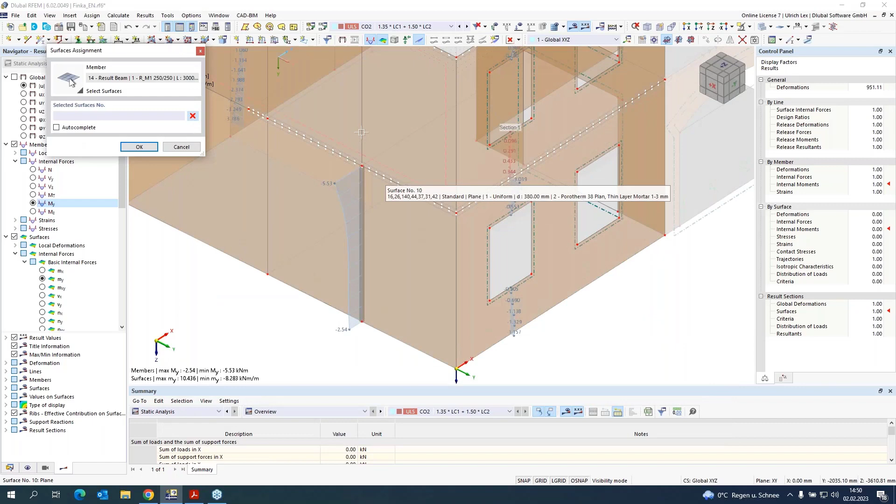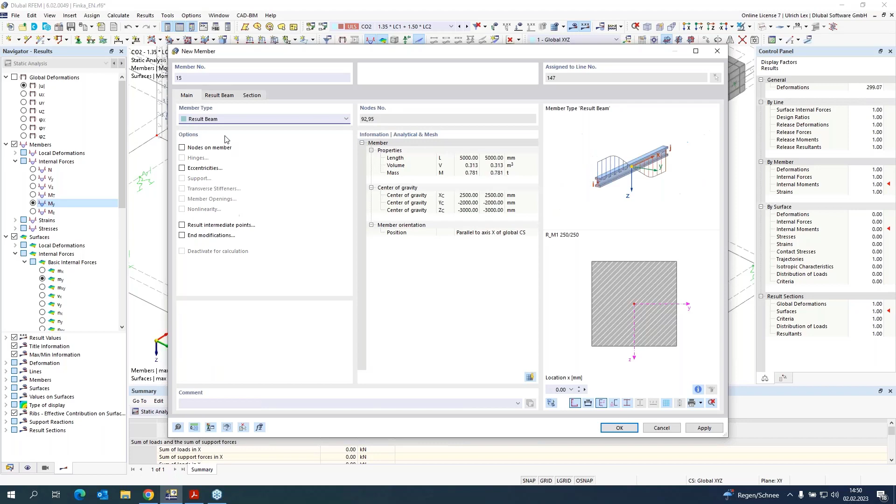Okay, and maybe also for the slab. Then I can see the results per meter on these different surfaces. This is a good way to check some special results.

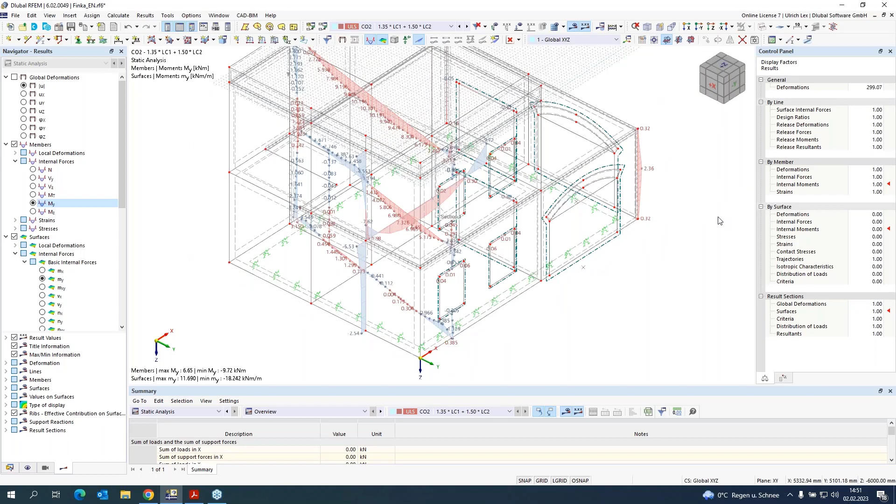Okay, then now I'm at the end of my presentation. I would say thank you for listening, and hopefully you have seen something new about our program. And I want to give back to Andreas.